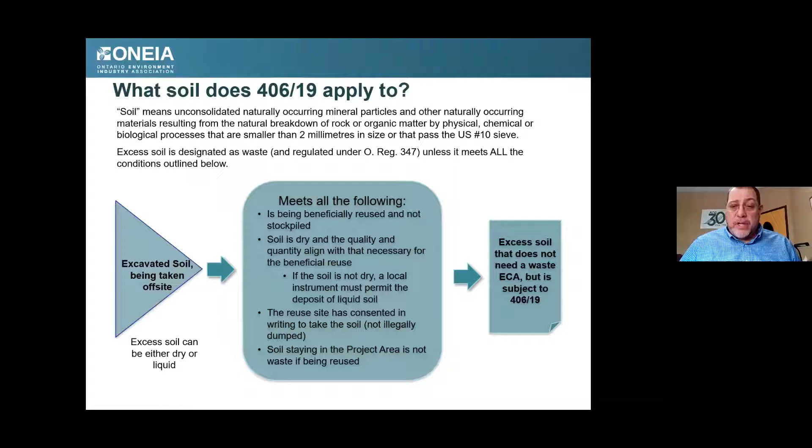If it's not dry, it must be dried either at the project area, processed there, or at a local waste transfer facility, or sent to a facility that has an environmental compliance approval, or a site with an instrument that allows for that - there are very few of those, but they are out there. The reuse site must also consent in writing to the reuse of that soil so that it's not illegally dumped. Soil that is actually staying within the project area, excavated and reused, will not be deemed a waste. So all of those things can be done without an ECA, but are subject to those rules under Reg 406.

The stakeholders around temporary sites would be the project leaders - the person in charge of the excavation work and deemed in control of the excess soil, either at the project area or at the temporary storage site, which we'll talk about. They usually have a qualified person working with and for the project leader, and usually the qualified person for both the project area and the temporary soil site would be the same. However, there may be rare cases where the QP for a temporary storage site would be a different qualified person. Other stakeholders around temporary sites would be the Ministry of Environment, district office, municipality, and conservation authorities oftentimes, if it's in a certain area.

So really, let's get back to what a temporary site really is. In the regulation, it's referred to as a Class 2 soil management site - a waste disposal site where excess soil is managed on a temporary basis, located, owned, and operated by the project leader of the site or a public body. Where soil is excavated, it can be operated without an environmental compliance approval, again operated by the public body or project leader. The soil there can only be stored for a maximum of 2 years, but can be extended up to 5 years with special approval from the Ministry of Environment, so you have to apply for that extension. The site itself cannot exceed more than 10,000 cubic meters of soil at any given time.

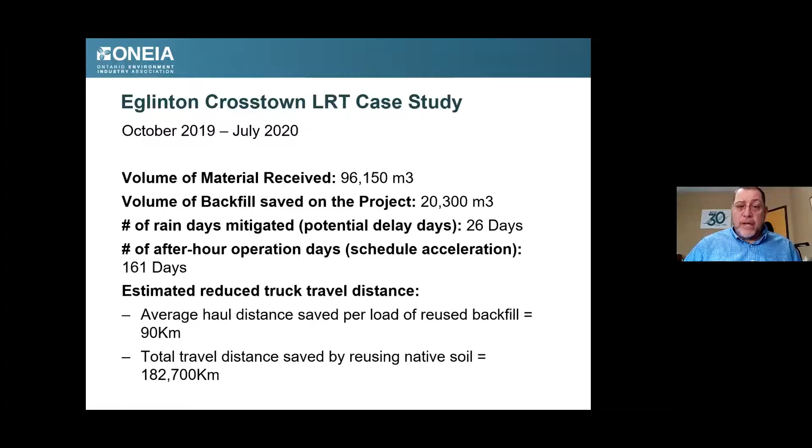A quote from their deputy director of alignment: ensuring that the use of this temporary site de-risked their excavation schedules and reuse of materials, and ensuring the natural environment was not compromised by their activities. And their recommendation is implementation of temporary storage sites when applicable for projects.

There's a life cycle around the use of temporary sites, and we're going to touch on these: site selection and permitting, the operation of the site itself, minimal processing, and then closure and rehabilitation of that site itself.

When talking about site selection, project leaders should consider zoning bylaws, reducing risk to health and safety of area residents, and ensuring that complaints for the operation of that site are limited, keeping sites away from residential areas where possible, and maybe employing them in industrial areas where you're less likely to receive complaints.

There are other areas that maybe should be considered, such as the Niagara Escarpment, watershed areas such as the Simcoe watershed, that maybe should be avoided, or at least negotiated with the conservation authorities and provincial authorities. Project leaders should contact the local MECP district office for further guidance when doing site selection if needed.

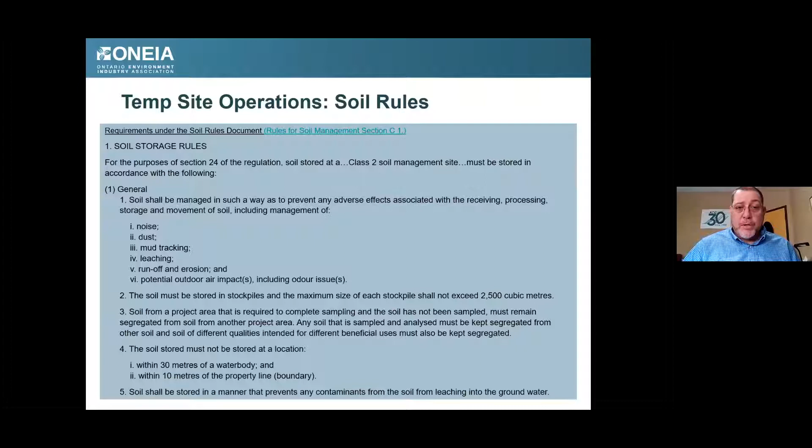Some of those rules would be: any soil that's stored at a temporary site needs to be stored in a manner that does not cause any adverse effect. Storage limits are up to 10,000 cubic meters at any given time, and stockpiles on those sites must not exceed 2,500 cubic meters, and that's a pretty big pile.

Soils should be sampled and analyzed ahead of this temporary storage, but in some limited instances that may not be possible. So if you're bringing soil that has not been characterized to your temporary site, it should be segregated from soil from other areas of your project area.

This involves employing QA/QC protocols to be adhered to in consultation with your QP. It's not acceptable to mix soils from different sources unless those soils meet the same excess quality standard and can be used for the same beneficial reuse.

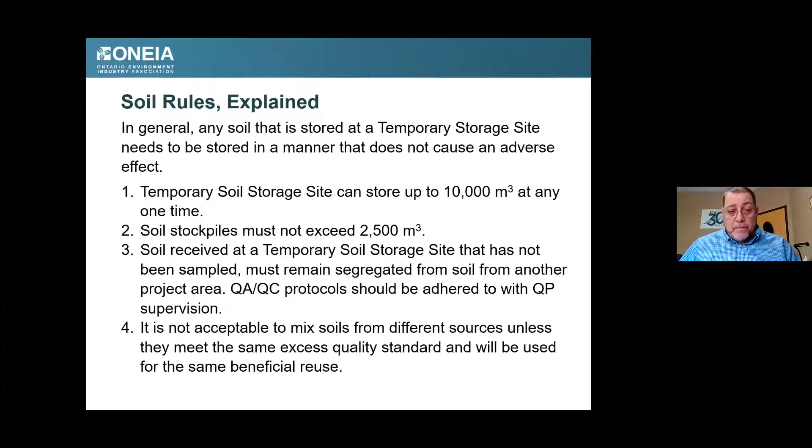Further, stockpiles must not be placed within 30 meters of a water body and 10 meters from the edge of the property. Soil should be stored in a manner that prevents contaminants from migrating or leaching into groundwater. This could be accomplished through reuse of impermeable surfaces if available on site, the placement of liners, and ensuring that drainage is maintained to the site, containment practices, and if necessary, covering the piles themselves.

There is a 2-year time limit from when the soil has arrived at the temporary site that it should be taken to your end use site or beneficial reuse site. This can be extended up to 5 years, provided that a timeline can be identified to reuse that soil, and getting approval from the MECP director.

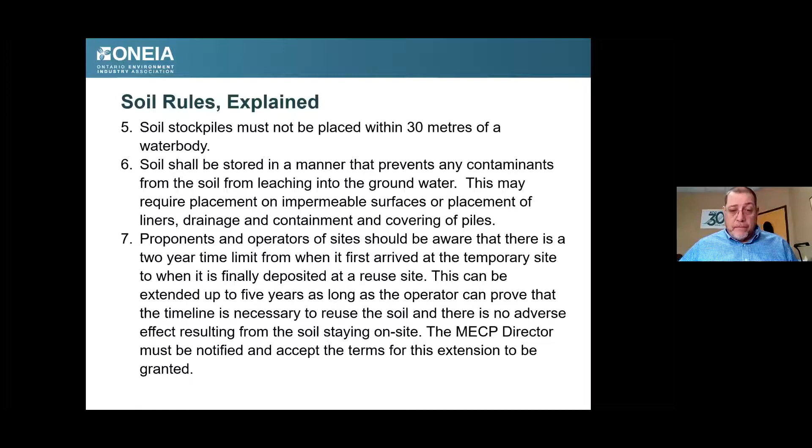Site operations themselves, when being designed, should consider storage and placement of the soil itself, traffic management in and out of the site as well as on the site itself, quality assurance and quality control of the soil, security for the site, load tracking, as well as being able to respond to different emergencies.

In terms of your storage and placement, operations of receiving, processing, and soil storage may need to address things such as air and noise, leaching, erosion, sediment controls as we identified.

Operating within the noise bylaw should identify acceptable hours of soil movement, making sure you've got dust control, including sweeping, tarping of piles if possible, wetting techniques if needed during hot and dry periods, active dust control during storage - could be watering, calcium chloride application, use of vegetation, capping your stockpiles.

Monitoring of soils for odor and organic components should have been done prior to use of the temporary site, but there should be protocols to address this if the site requirements for odor are not being met, and that soil should be quarantined, removed, managed appropriately.

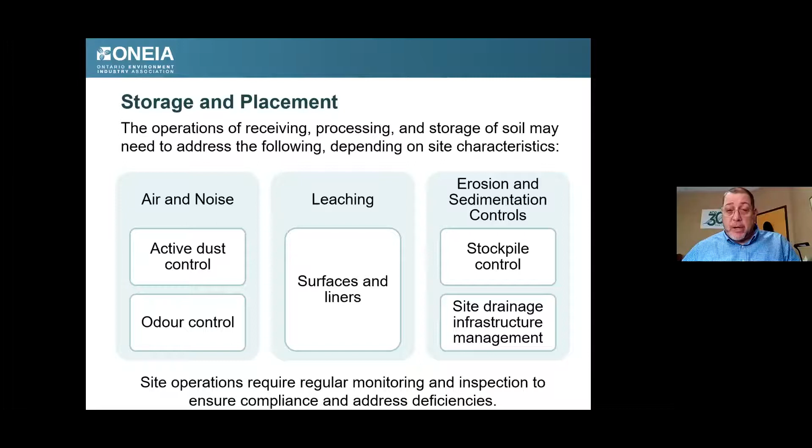Traffic management. Owners and operators of these temporary sites should have traffic and transportation management plans that address some of the following concerns.

On-site traffic management: consideration should be made to the size of entrance and exit locations to allow for proper vehicular traffic flow, for trucks which are bigger than the average car. Sometimes entrances and exits need to be made so trucks can safely turn in and out of the site. Limit left-hand turns for trucks into or out of the site where possible.

Ensure traffic control personnel are present during peak traffic movement to mitigate impacts to local and regional road congestion. Consider appropriate speed limits on your sites to ensure safety, as well as dust mitigation, since dust can be generated when trucks move too quickly.

Ensure there's adequate space for vehicles to back up and turn around on your site. Limit queuing and parking on public roadways, which is very important.

Limiting idling: consider implementing not-idling requirements with measurement and tracking of that on your site. Also consider ways to limit noise related to truck traffic, for example configuring the site to use existing physical barriers such as buildings, fences, or soil berms to act as sound barriers for truck traffic.

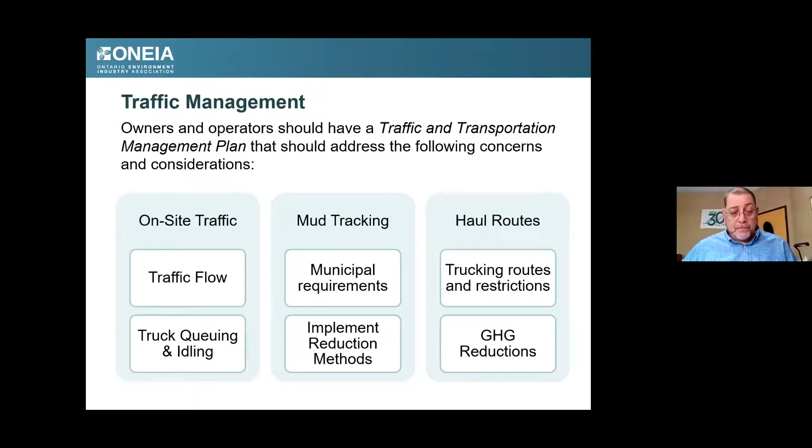Temporary sites should have a quality assurance and quality control program to assess soil quality and management of soils on site. The operator should consider implementing an audit sampling program to verify that soil quality is compliant with the temporary and reuse sites.

QPs are required to complete the assessment of soils for the site. They'll also be key in reviewing reports from inbound soils and verifying reuse site quality compliance for outbound soils.

It's important to note that Class 2 management sites require an excess soil destination assessment report for each project that will be importing to the site. Further direction on what is required in that report has been outlined in the soils rule document.

Soil quality and characterization should take place prior to the soils arriving at the temporary site, but in some circumstances the temporary site may be used as a holding area to confirm quality. As discussed earlier, that soil should be kept separate from soils of known quality until it's been characterized.

Rejected loads: in some circumstances it's possible that off-spec or unsuitable loads are received at the site. It's important that the operator and the QP develop a rejected load procedure.

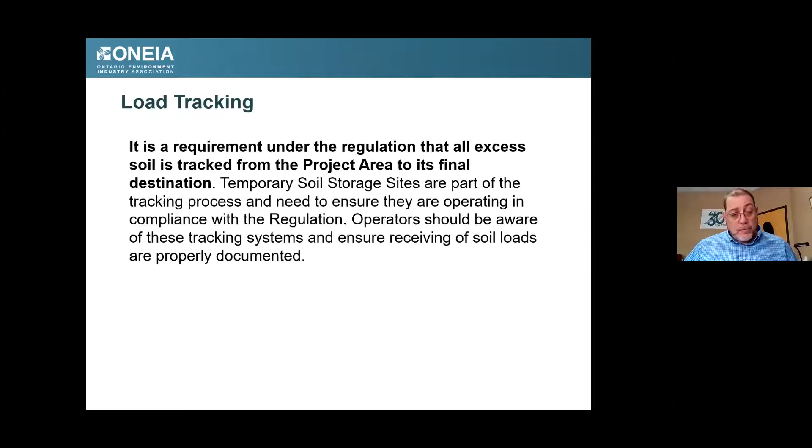So if you're generating records for a temporary site, how long do you need to keep those records? Here's your options. A, I don't have to keep it, it's the responsibility of the hauler. B, 2 years. C, 7 years. Or D, forever.

The answer is 7 years. From the date of delivery, hauling records are required to be maintained for 7 years under the regulation.

Records themselves, there's a couple of benefits to both systems, either paper or electronic. Under the paper system, there's no special technology required to implement that, no energy or power needed to operate. It's generally easy to use, and it's really been the system that's been in place for many years.

Drawbacks of the paper system: the paper tickets and so forth could be easy to lose. And there's administration around the filing, scanning, record keeping, and being able to generate those documents when required. Filling things out by hand, the legibility can also become an issue at times.

Versus electronic systems, where electronic information can be integrated and shared to reduce the administration, easy to look up and reference certain documents under the electronic system, and it reduces the need for actual filing of those documents.

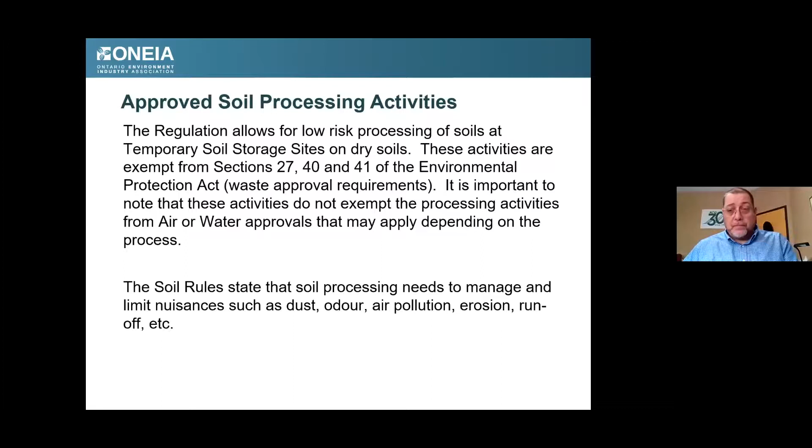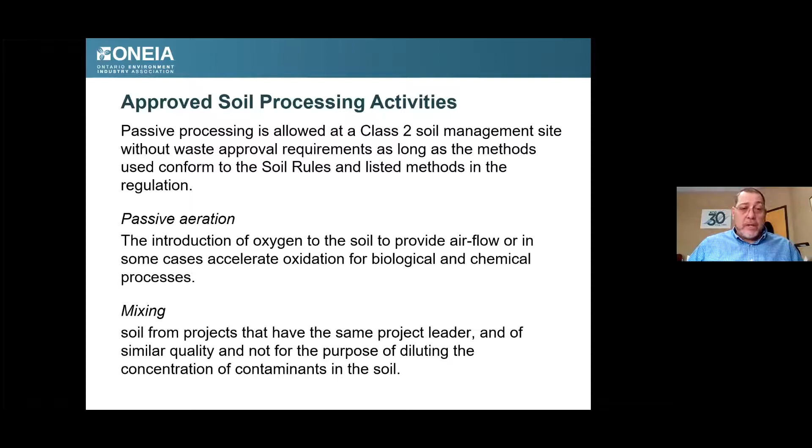To touch on some of the approved soil processing activities - these are classified as low risk activities and can be conducted as long as they conform with the soil rules and listed methods in the regulation, including passive aeration, soil mixing, soil turning, size-based sorting, and sorting or screening for the purposes of removing debris.

It is further identified that liquid soil processing is not permitted at temporary sites. Drying and dewatering of liquid soil is permitted at the project area or source site, as well as at local waste transfer facilities and at ECA-permitted sites with appropriate instruments.

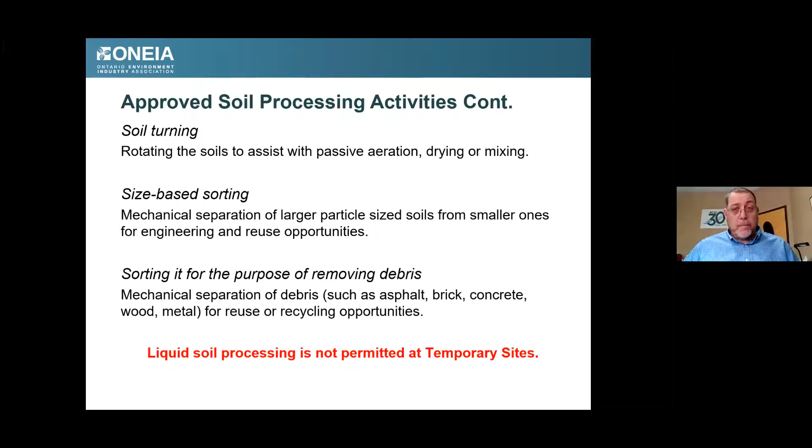Site closure and rehabilitation: once you're done with your temporary site, it's important to include certain activities such as post-condition surveys of the site, comparing those to the pre-condition survey done before you used the site, and reinstating any services that may have been temporarily suspended for operations, where necessary.

Post-environmental monitoring and reporting around soil and groundwater quality sampling, analysis, and monitoring. Restoration of grading and a plan around that. Restoration of any natural features - trees that may have been damaged, grassed areas, ditches, swales. Closing of site entrances and exits, and notification to the appropriate agencies of closure, such as the Ministry of Environment and the municipality.

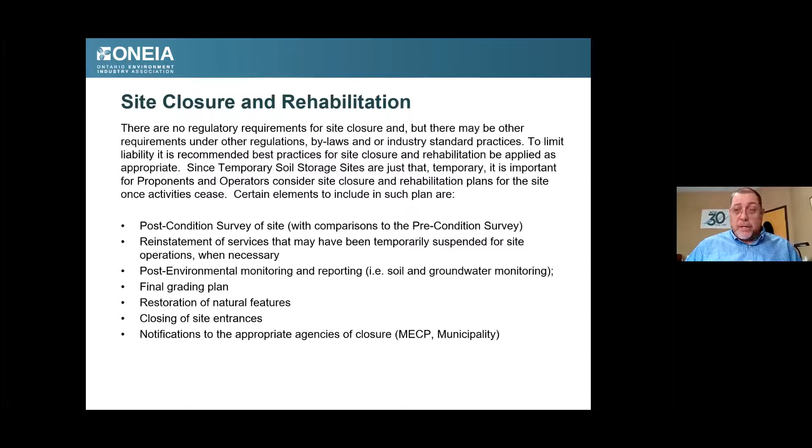At www.oneia.ca/excess soil, these training documents or tools are wonderful - Janelle put those together and they are in the Prezi style. You navigate through the training operations of the website on your own, pushing yourself through each of the bubbles in the training on the Prezi platform, which keeps the person engaged and can be done in a group setting or on your own. Those are available for each of our best practices on our website.